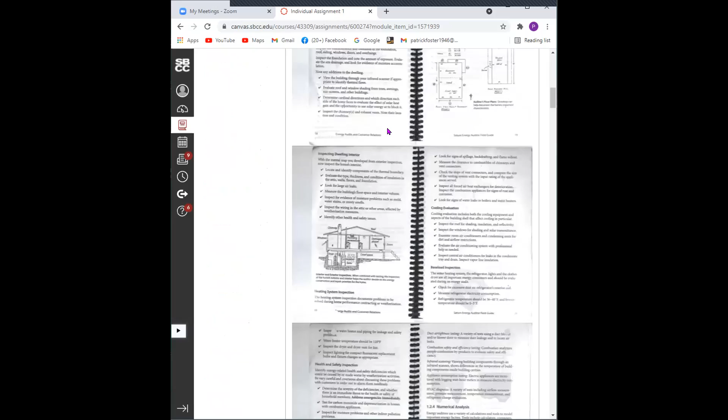This isn't the one, it's the same series. I'll show you in a minute the one. But for next week, you can just read the stuff I have on here. And there's some stuff that I wrote, and then it's on audits. And I used to have a whole class on audit where we used that book.

Saturn has a whole series, and one was on energy audit. Occasionally I use it for this class, but it didn't have the other stuff, so I stopped using it for this one. But I've used a lot of the content of that book for the audit. And we've made audits over the years, so we'll go through what a typical audit might look like.

So this will be for next week. Scan through this, read the stuff you can read. Obviously, you don't need to read everything, just kind of get an idea of what that's about, and then we'll go through it next week. Occasionally, usually the assignment will have just a reading assignment. Occasionally there may be some questions from the assignment, like 5 questions at the most, but often it's just reading.

And then journal. So this first night, I have actually some information about the journal. I want you guys to write an entry, and there's many reasons for that. One is that a lot of you don't write much anymore - you've got cell phones and computers, and you don't actually write or sketch or draw figures or doodle. And I think all those things are important for construction and for just normal human activities.

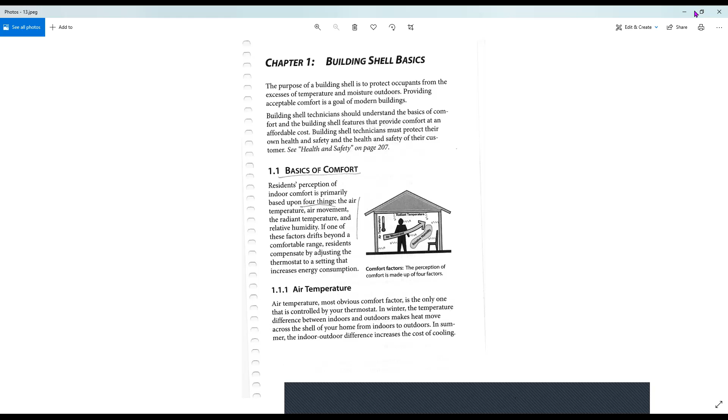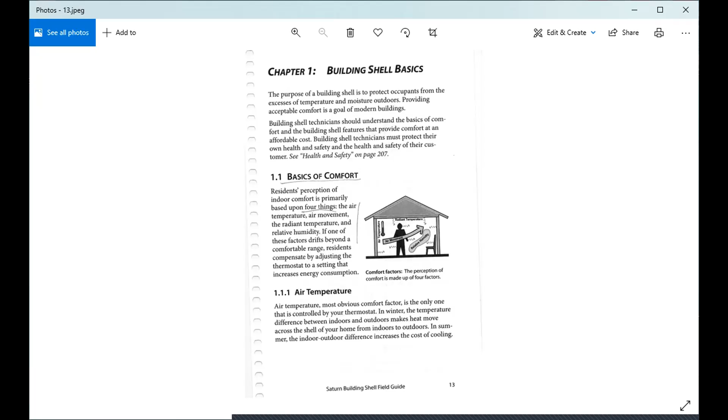I forgot to mention it, what would be great is if you all had a pencil and paper to write down things. I know some of you like to put them in your phones, but it's faster if you just write them. This word 'building shell' or 'shell' is used a lot in architecture and construction, and it just means the outside frame of the building - the walls, the ceiling, and the roof. It's like a shell that covers the building. They'll use that term a lot, so you need to know what it means.

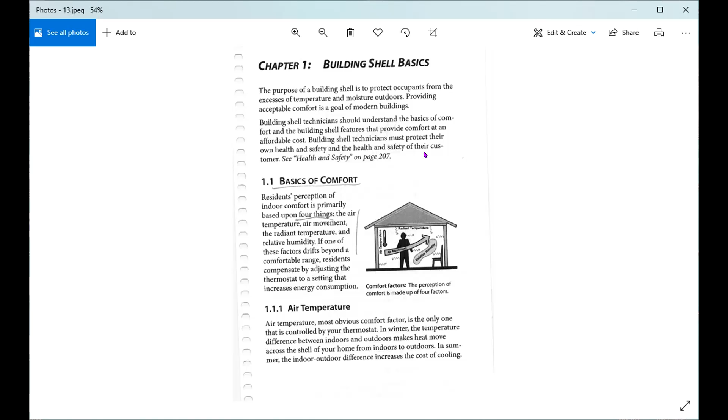And the name of this book I got this from is Building Shell Basics. So it's really about building performance, but they happen to call it Building Shell Basics because the way they look at performance is through the things that have to do with the building shell.

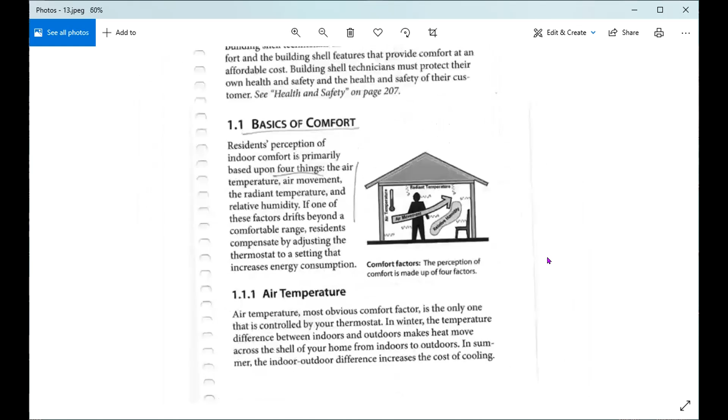So, basics of comfort. Of course this doesn't have... see, the problem with this is now I have to go. Oh great, okay, we're just going to go through this real fast. This is like the first chapter of that flip book.

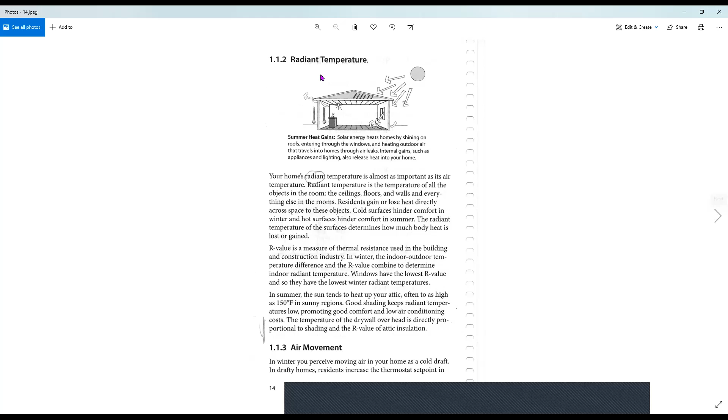And they talk about temperature, obviously, and they talk about relative humidity. Humidity is something else - you can actually get sick if you're staying in too humid of an environment.

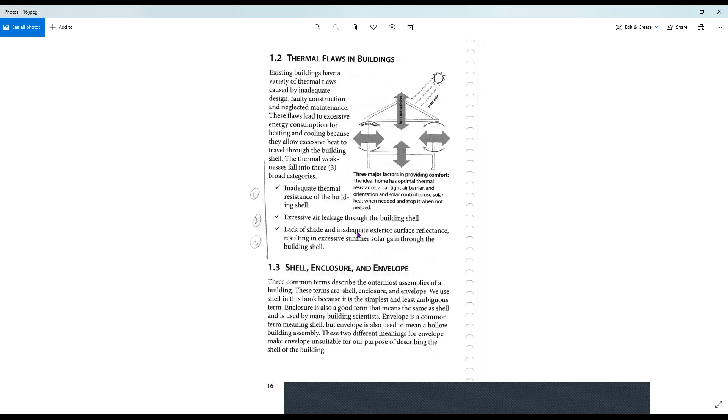Shell, enclosure, and envelope - these terms are interchangeable. Sometimes they call it a building envelope, sometimes they call it a shell. You don't hear 'enclosure' too much. Then they have a little subunit on thermal flaws in the building: inadequate thermal resistance, excessive air leakage, lack of shade. We'll look at all those in much detail.

And then they talk about thermal boundary, which I think is a little overblown and too conceptual. We'll talk about it a little bit, because when they're trying to keep air in, you want to know how much of the house you want to heat and keep tight, and other areas you can let go.

Then, of course, we'll do a whole thing on insulation - that's really come of age. Then air leakage and air sealing - what forces drive air leakage? There's a lot of forces like wind that pressurize your house because they're driving in. The air always has to go somewhere, and it has different routes it goes. So you have to learn about all those and deal with them.

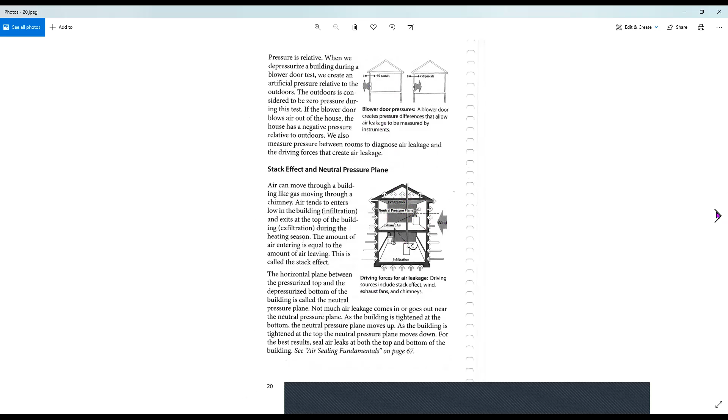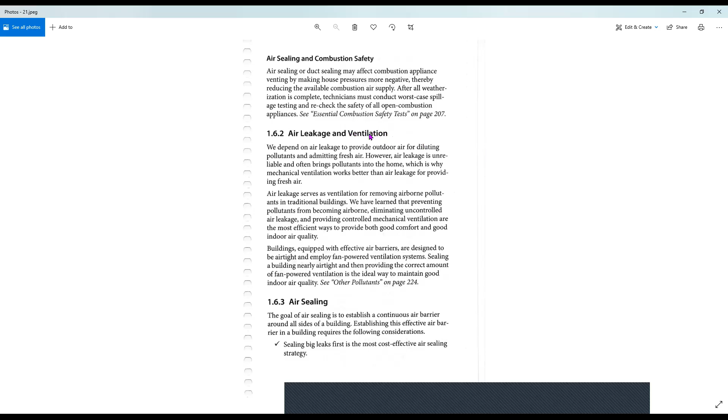Then ventilation is a huge topic. As we've learned to tighten houses, we've tightened the shell so it doesn't leak as much. Then everything we bring into the shell, like crappy furniture that's got a lot of toxins in it, becomes part of your air - it doesn't go out naturally. So ventilation's become a lot more important, and we have to deal with that.

Air sealing keeps the treated air you've either cooled or warmed from leaving quickly. And then shading and reflecting sun is important for hot areas. So that's kind of how this book approaches it.

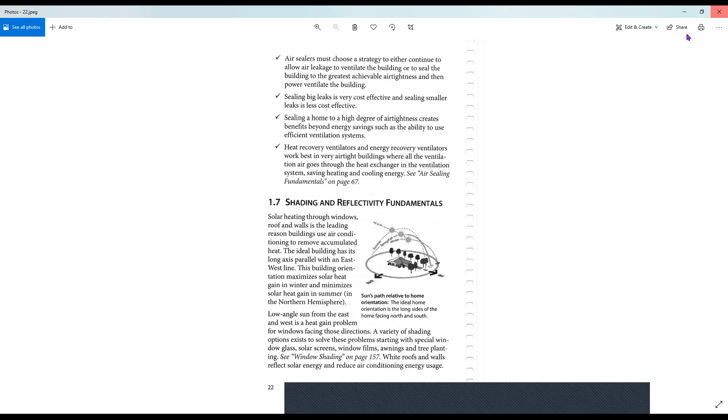If you look at the presentation name of all the modules in your Canvas, remember we just looked at it - if you want to know all the stuff we're studying, you just look at the titles of each thing.

When we first started thinking about saving energy in the house, we started thinking about making the houses more tight. So air will leak out of a house. The walls have siding or stucco on the outside. In Santa Barbara, we usually build stick frame with studs, insulation, fiberglass in the wall, sheetrock on the inside, sheetrock's taped, we paint the room. That's our line of defense for losing air.

The air in Santa Barbara doesn't take much to heat. Do we have the heater on much during the year here? No, unless you live in North County, probably a little more, or Ojai or some of those places. So we're not too worried about leakage, but if you go anywhere else in the country, leakage is really important because you're paying money to utility companies to heat or cool that air. And if it's leaking out of your house from big gaps and holes, you're just throwing that money away. And your house isn't comfortable anymore. It's not cooling you off enough or heating you up enough.

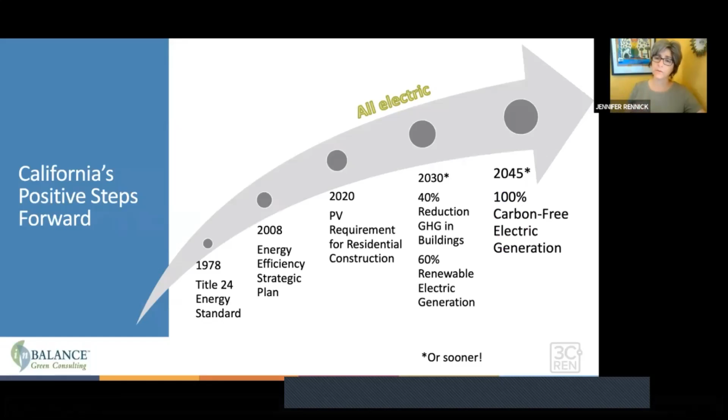So in California, the energy code part of the building code has been stepping us up to better and better performance, with the ultimate goal of getting to 100% carbon-free electric generation, and with that, nearly all buildings going all electric. There's existing building stock out there, but new construction would be able to take advantage of a better carbon-free electric energy grid. With that in mind, a lot of what we're talking about today is techniques for building your building better so it will be easier to rely on electricity generation from renewables.

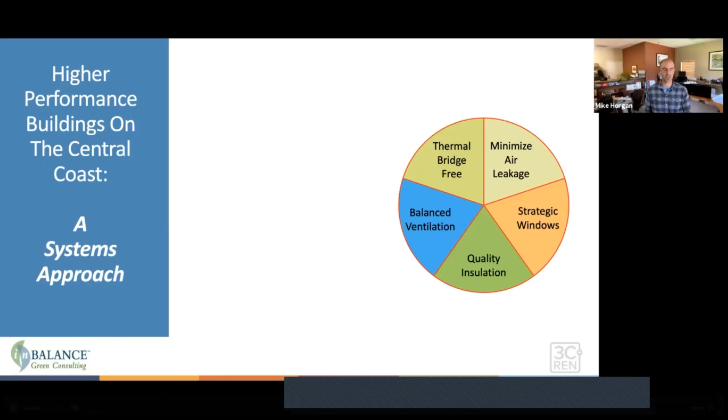We've found through practice that if you're not going to go for Passive House, there are 3 other main principles that can really push you over the edge from a kind of blah code compliant building to something much higher performing in our region.

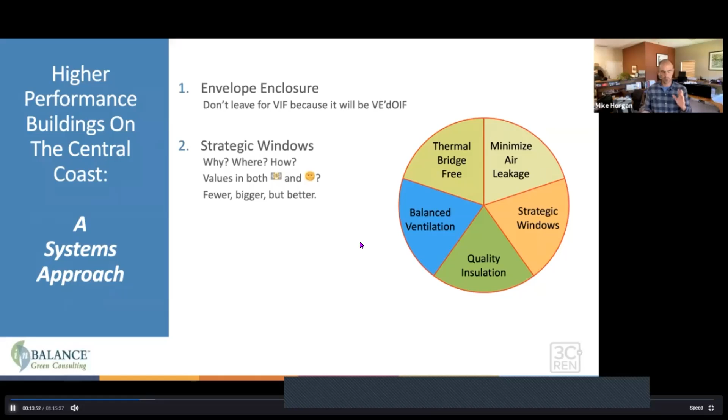The first would be paying attention to your envelope enclosure. Don't leave your envelope enclosure to be verified in the field. If you're an architect, you should verify that on your drawings, because if you leave it to be verified in the field by a builder, subcontractor, or trade partner of your general contractor, it will be value engineered out. Right from the get-go, you've put yourself at a disadvantage. So architects can take control of that right from the beginning.

The second principle we've noticed that really can make a gigantic difference is the use of strategic windows.

Where you put windows, how you operate them, and the kinds of windows you're using matters a lot. Thermally broken windows make a gigantic difference. We have images in other workshops showing the difference between a thermally broken window and a non-thermally broken window in California, and how one of them will transfer nearly 100-degree heat into a home or building, even at 8 o'clock at night. So windows make a gigantic difference here.

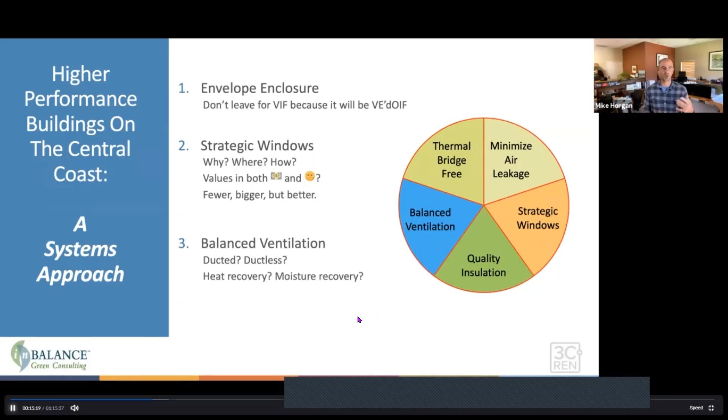The last of the three main principles that makes a big difference is introducing balanced ventilation. So we've tackled the envelope enclosure, looked at what kinds of windows we're using and how they operate, and now we're introducing balanced ventilation instead of relying on a leaky envelope and a whole house fan pulling uncontrolled air infiltration into the house from who knows where. We want to take control of that ventilation in our homes.

You want that envelope to be weather and watertight, of course—no leaks, no lawyers. Airtight, so outside stays out, inside stays in, and the two should not meet unintended, but it's okay if they meet intended. So you want to take control of that, and that's something we've not done in the past.

Thermally tight—no paths, no bridges, no highways. That's what we're talking about with good windows, thermally broken windows. So when the sun is beating down on the exterior of your window and that window frame heats up to 110, 120 degrees, that heat's not transferring to the inside of the building. The inside should stay the same ambient temperature that your occupants want it to be.

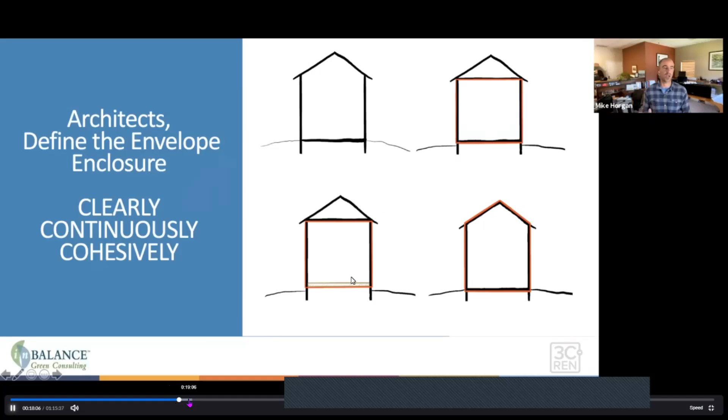This is a continuous vapor barrier underneath our concrete. That doesn't mean pieces of plastic strewn around with sand thrown on top. This is a home I'm building—just two layers, two full rolls rolled out, taped at all the seams, taped at all the penetrations, taped at all the stub-outs, mastic around the edges of our footings, so that it's a 100% continuous vapor barrier. Continuous, continuous, continuous. Then we work our way up the walls with our sheathing and wall membranes.

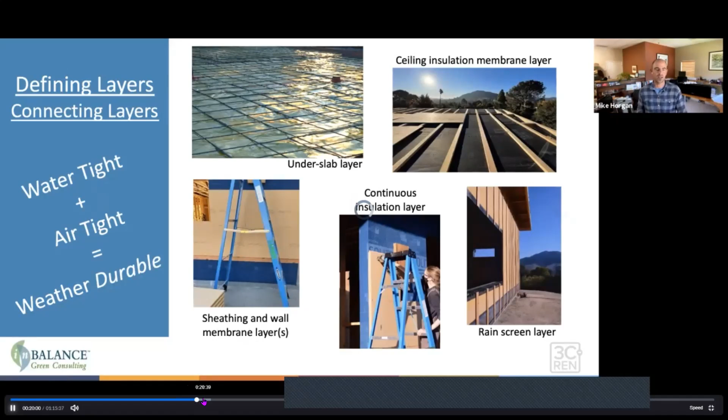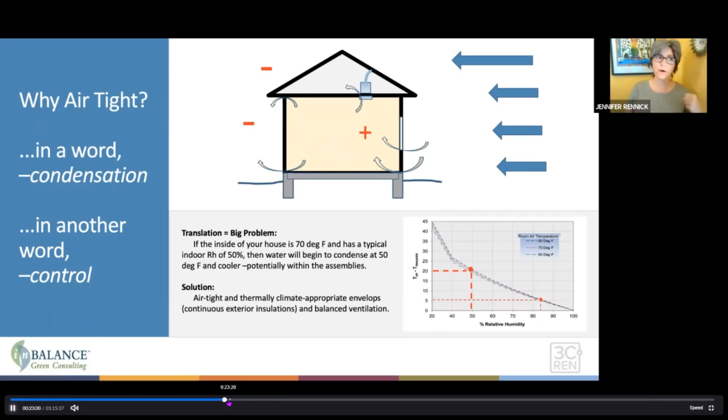A lot of times, especially North County of San Luis Obispo where I live, and in inland counties of Santa Barbara and Ventura, we easily have times in the winter with wind loading, leaky walls, and outdoor temperatures below 50 degrees Fahrenheit. So every place that wind or air gets pulled through our wall, roof, or floor assemblies is a place for potential condensation. This is fairly typical construction in California.

This is a higher performance home that I'm building, so we're really on top of it and paying attention to little things. But even still, typical framing leaves a gap where you'd have stub outs. We're not going to use a hole saw to cut our sill plate and strategically stand the wall up, then lower it down on top of the stub out. So framers will just cut out the sill plates, leaving a big gap.

Now our plywood sits above the slab so it doesn't get wet, and it often never gets sealed. So you've got anywhere between a 1/4 inch and 3/4 inch gap behind a stub out in a kitchen. That's just a big hole for air to move through.

I think this is just about a minute long here. We'll talk through this. In typical construction, that gap is generally just left, and different temperature air ends up coming into the home.

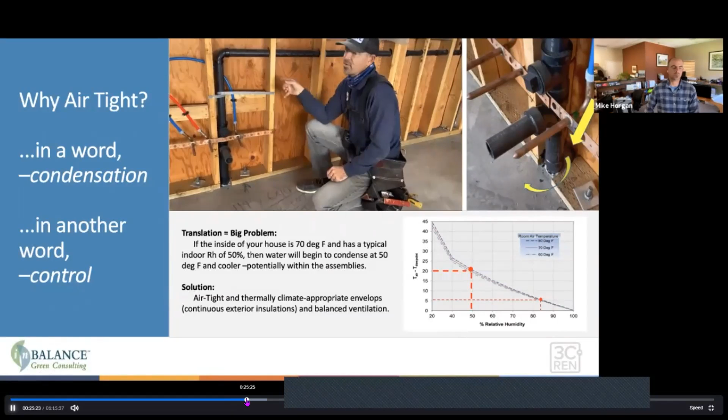Jennifer's talking about where we have that difference.

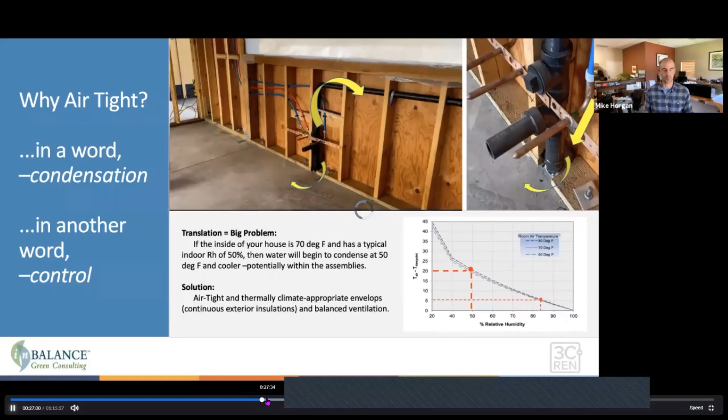Watertight, airtight — we're really trying to go for weather durable, not beating nature but working with nature, building assemblies that can dry out. If they do get wet for some reason, they're able to work with that and dry out over time. I'm skipping around because there's no sense hearing those details before we study it in more detail.

This is just an overview, but they've switched to the outside, and this is the siding they have on the outside. Now it's recommended that you put strips to let air flow behind the siding in case any water gets in — it can drip down, and air can come in and evaporate it. We'll talk about that later.

This section for every project that we put together usually takes a few hours, and you might think it's a waste of time — you could just tell people how to do this — but they were really into it. They became really vested in understanding how it all went together and having the mock-ups on site. We taught these guys pretty quickly how to run an adhesive around the footing, then drape the membrane down the side of the sheathing and attach it to the foundation. It all made a lot of sense, and they picked up on it in seconds. Hopefully they'll take it to the next practice as well.

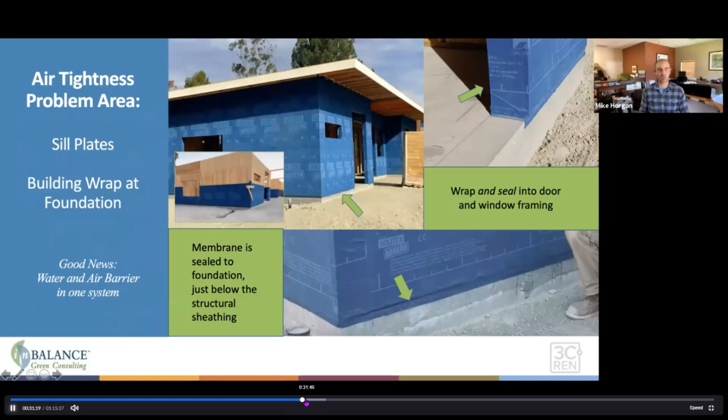Mike, I've got a quick question to follow up on that mock-up slide. Sure, go ahead. Patrick was asking about... that's right.

If water gets in behind the siding, based on this structure, it's going to hit the insulation. If it's not protected by Tyvek, what's your thinking on that? Is it going to deteriorate the insulation?

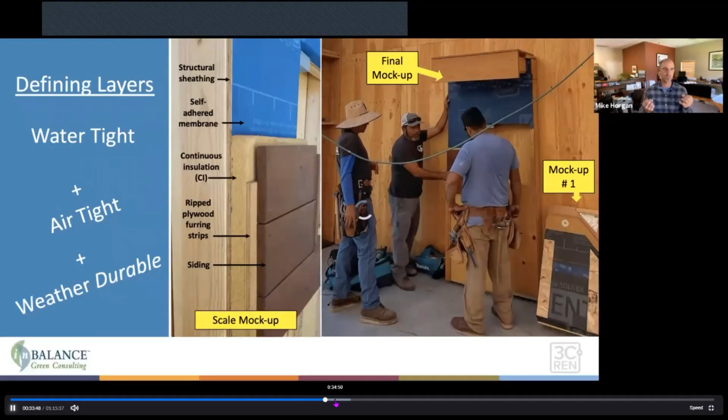Okay, why is this important? We're working our way up the wall. And Michelle, I'm keeping an eye on time, so thanks.

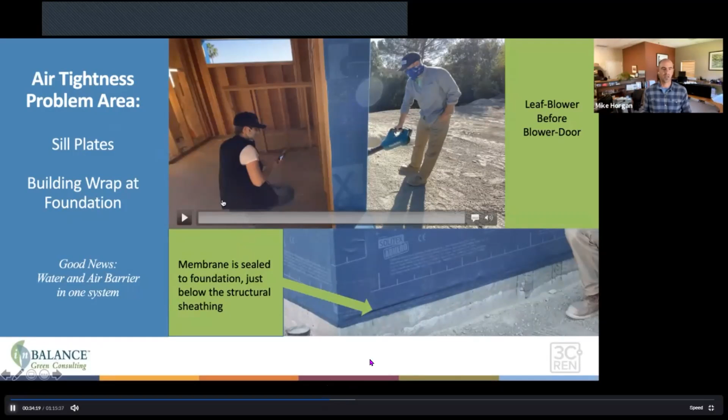Does this work? Is this really a necessity? So what we've done is taught our framing crew how to bring that membrane down and adhere it to our footing. Jennifer and I went back and tested the efficacy of how well this worked - we piled up a bunch of sawdust inside, right at the edge of the sill plate. Right in front of Jennifer, in the primary bathroom here, we've got a few vent stacks coming out of the sill plate.

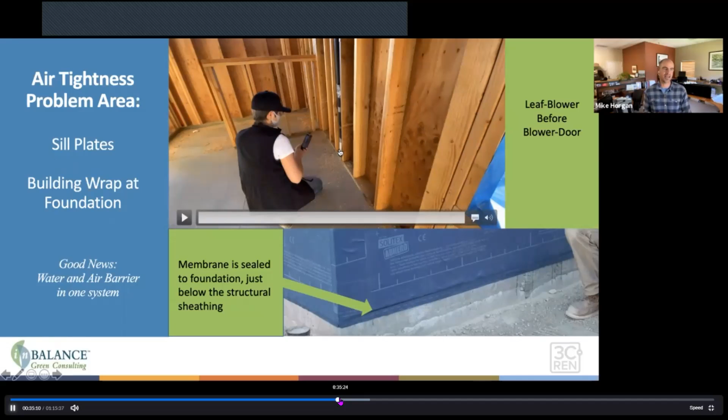It's a goofy video, but it really does show how well this works. That's a Makita cordless leaf blower on full blast, trying to push through this vent stack, which has a half inch gap in the plywood with only a membrane covering that gap. But that membrane sealed to the footing. So does it work? Yes.

All of the things we were consulting on, and all of the things the homeowners wanted, were dependent on a non-leaky envelope, on controlling the leakage of the envelope. That step was skipped completely and no one was ever held accountable for it. So they've got this really nice HRV system, heat pump heating and cooling, they've got PV - but they've got gigantic holes in the building envelope all over the place, and none of them have been sealed or had any attention paid to them. They've missed a gigantic importance.

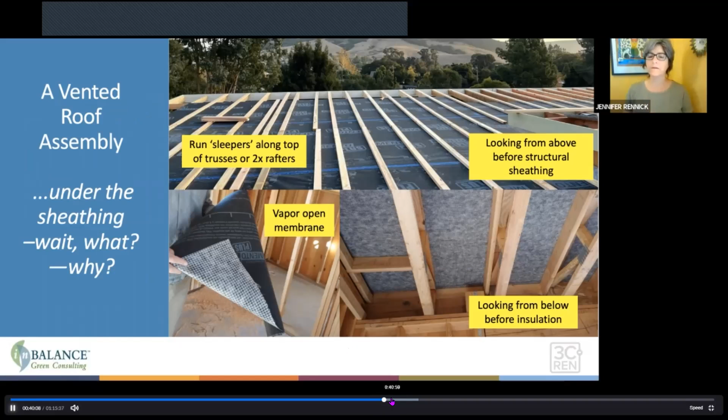Keep going, and I'll be quiet. This is just an example of real life mock-ups.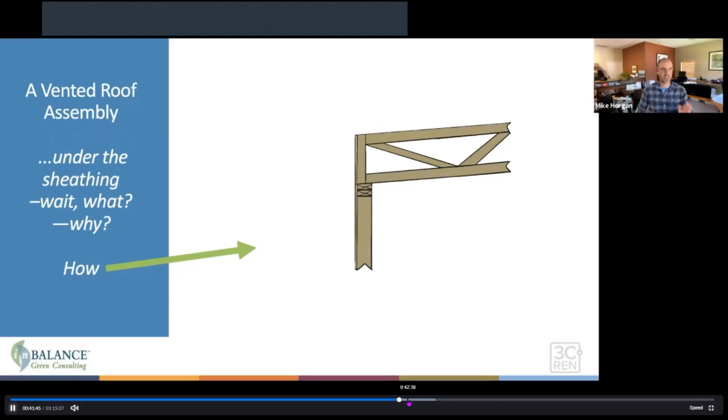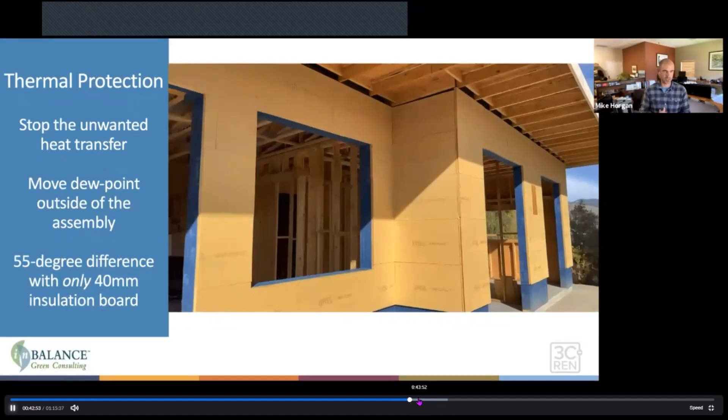This next video, which isn't very long, will show the follow-up efficacy video of this project. We're exterior all wrapped with insulation now that we're using - this wood exterior fiber board insulation has been outside the house for about a week, and it's stopping heat transfer moving through.

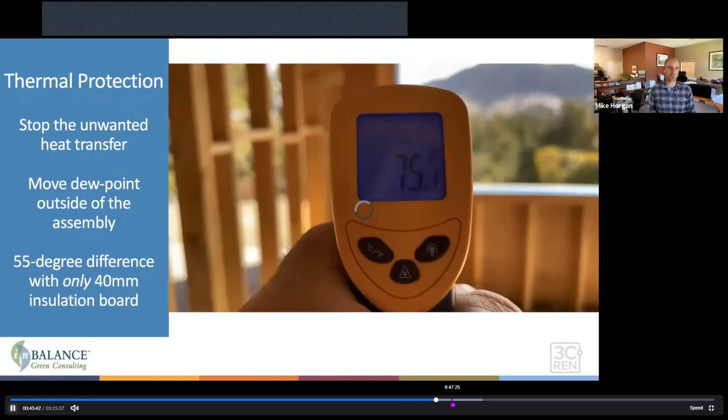Performance buildings in general - windows and the strategic placement of windows. I'm going to give a high overview and then touch on daylight and views, and how important daylight is for psychological well-being. We understand that part of good design - I'm an architect, I love windows, I want lots of windows.

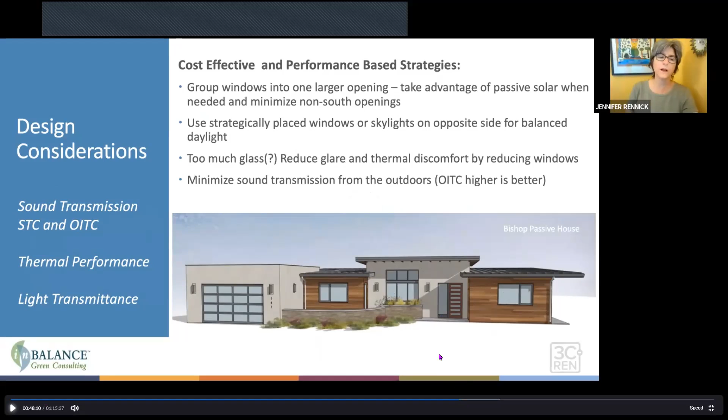The thing that's become really important is sound transmission class of windows and wall assemblies, especially if you're building near freeways and highways. Sound has become another aspect of window performance - sound protection. It's interesting - we've just sort of lived with all the horrible sounds over the years, and now we're starting to do something about it.

These mitigate sound transfer, and they do help with heat transfer too. They're cost competitive now - 5 to 10 years ago, getting these triple pane windows from Europe, since they weren't even made in America at that point, you really had to be an early adopter.

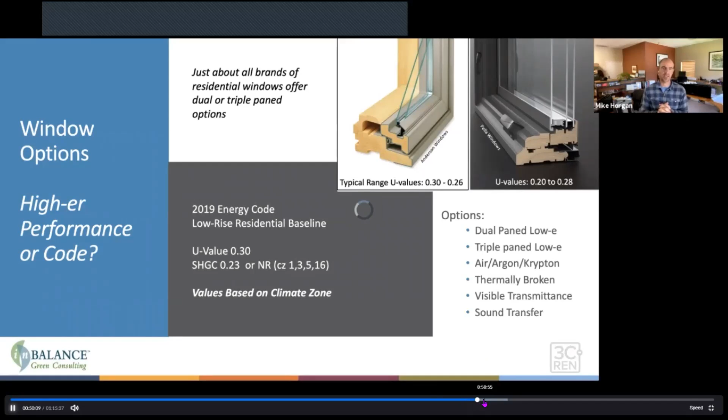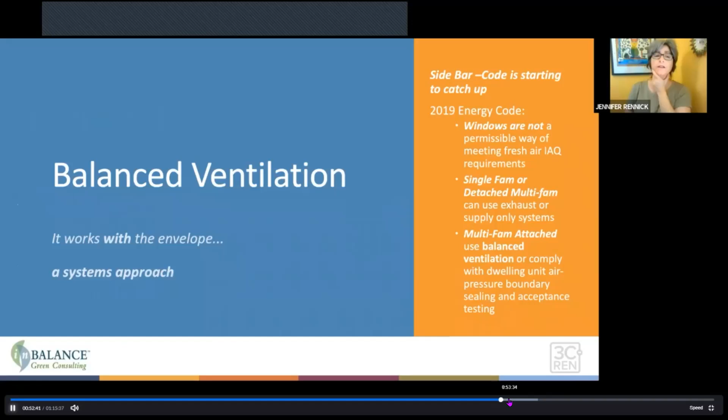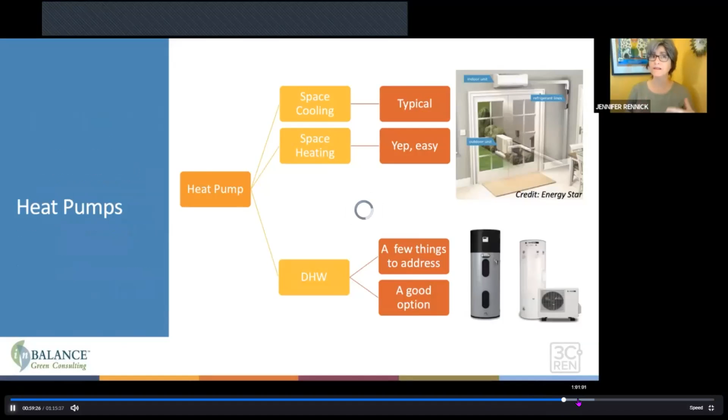A couple decades now, and code is kind of catching up to those ideas. I feel like Jennifer's been at this for a lot longer, and now it's being proven true that our buildings and homes play a huge role in the health of the entire planet, the human and planetary environment. So largely we were talking about operational aspects, but now we've taken care of that and taught you all how to build zero energy, low operational carbon homes.

This is a typical building with a fairly high operational carbon footprint, and that's a slice of the pie. The other slice is called embodied carbon, which is the carbon that goes into making our materials, transporting them, and the kinds of materials we use. Now that we've lowered operational carbon, not as low as we can, but getting better, our embodied slice of the pie is a lot bigger. So it's time to shift our focus.

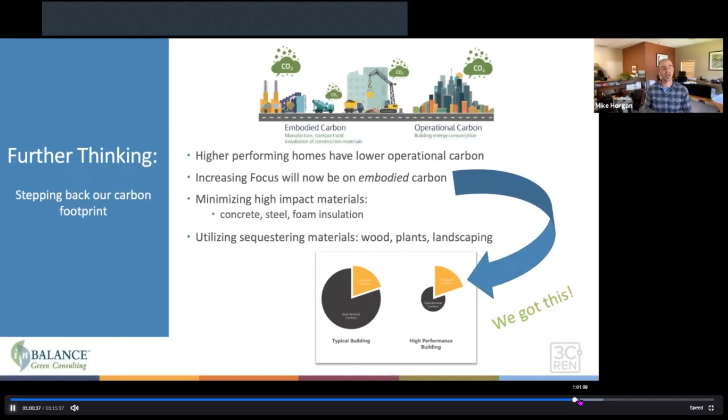We're going to jump past operational carbon, since lowering that is fairly easy, and now focus is probably going to turn towards embodied carbon footprints, and it really needs to. So thinking about the materials we use, this is from Chris Magwood.

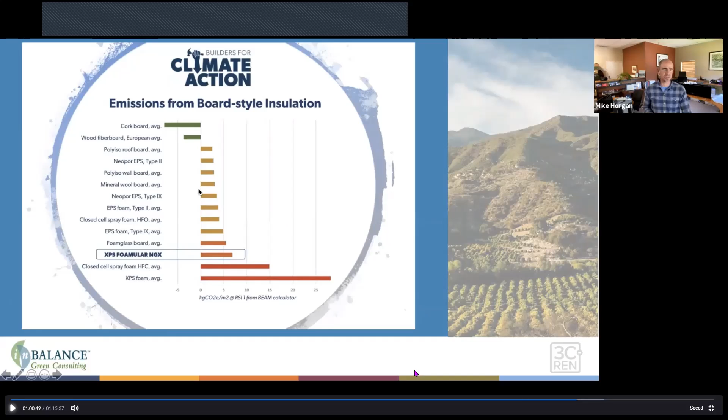I'll cut through this because we'll study it later. But not only does insulation get rated for its effectiveness at holding heat and stopping heat flow, now we're rating it according to how much energy it takes to make that insulation. So if we use tons of energy to make a good insulation, we've still lost a lot of that energy in the embodied part of it. We're finally realizing we have to think about how it's made too. So slowly but surely, we're getting all the details of energy savings, whether in manufacturing, materials used, or how it's used on the building itself.

Okay, we can skip the questions. Isn't that great?

I just wanted to give you an overview. I didn't want you to have to understand and remember all the details right now, because we're going to have a unit on almost each of those things, and we'll talk about each in detail. None of it's that hard, it's just a lot more involved than it used to be, but it's all things we can understand. I try to break most of it down into pretty simple science.

Any questions about the stuff tonight?

That guy's a pretty interesting builder, the guy who gave that talk. He's from Massachusetts and lives in San Francisco part-time, and he's doing a lot of building down here. He's got a lot of good ideas. And the architect is Rennick, she's a sustainability and building performance oriented architect, so her ideas are good too. They're building buildings in this area, so it's really relevant stuff. You'll probably be pretty amazed at some of it if you just haven't seen it or aren't used to it.

So no questions? I have one. Oh yeah, good. At the beginning of class you said this was one of the better courses to teach online. What kind of stuff do we miss out on by being online though?